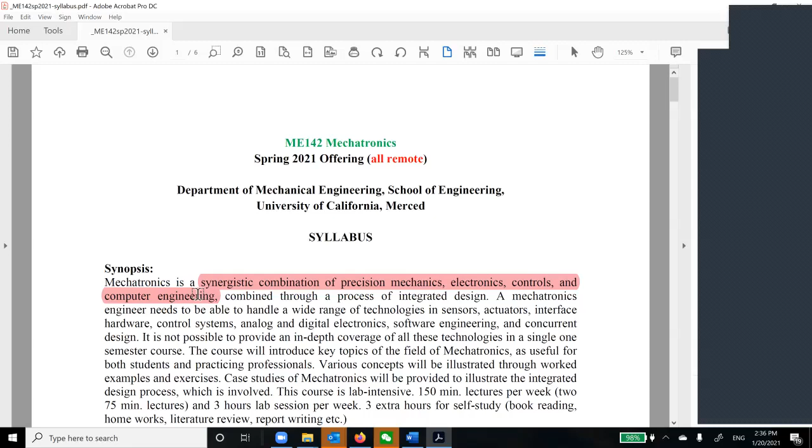So let me do this, I think I can get something here. So this is the word you should remember, called synergistic. Mechatronics is a synergistic combination of precision mechanics, electronics, controls, and computer engineering. So you have 4 aspects.

So mechatronics is going through a process of integrated design, so this is another term, integrated. We are going to go through this one later in today's lecture. So you should be able to handle a wide range of technologies, okay, in sensors, actuators, interface hardware, control systems, analog digital electronics, software engineering, and concurrent design.

So what we are going to do is not to pursue an in-depth coverage, on the other hand, we cover all the foundations. So this is a course called Foundations of Mechatronics. Over the years, I started my career in UC Merced in 2012, so it's been my 9th year.

I'm thinking about Mechatronics II, so more advanced topics. So this is, again, this is the foundation class, okay. So we are going to cover all the key topics in mechatronics, so you are ready for the career. And I believe this course will make a big difference in your job market competitive edge.

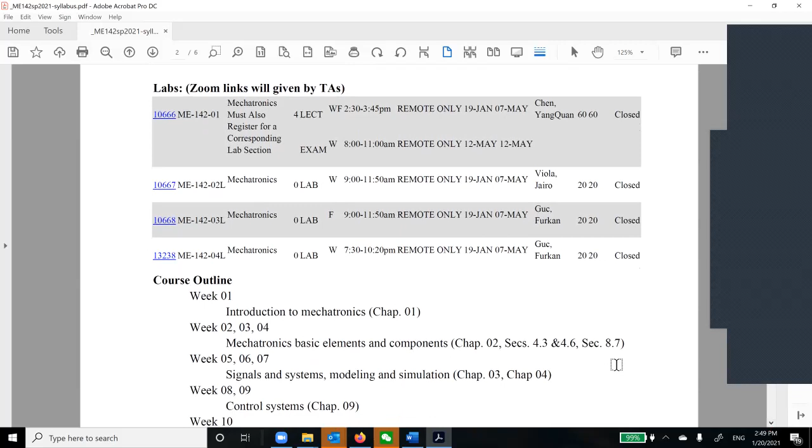So here's an outline. Today we are here, week 01. We are doing the intro.

I want to tell you that the definition of mechatronics is not unique, there's no agreed upon definition. So I want you to look for more definitions of mechatronics. That's homework number 1: go to the websites, find your favorite mechatronics clips, and summarize the top definitions you like.

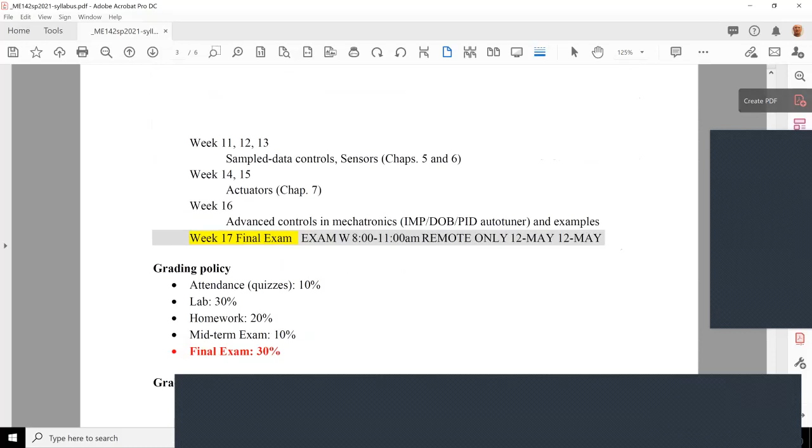Then we have about 3 weeks on components, elements, and components. After that, we are going to do signal and systems, modeling and simulation. We'll probably speed up a little because our labs are all distant and remote, so we need to heavily rely on MATLAB Simulink.

Good news is we are going to have interactive labs, and in the end, hopefully you are going to design some of them for the future. So you can see I'm covering modeling and simulation, signal systems, control systems — these are supposed to be separate courses. On the component side, microelectronics and op-amps, we're going to cover some of that.

Then we have a spring break, so I'm going to give you a take-home midterm exam. It's a way to force you to summarize everything up. After that, we're going to talk about digital controls, controlling using the microprocessor. What are the things there? Sample data control, and what's the consequence of sampling?

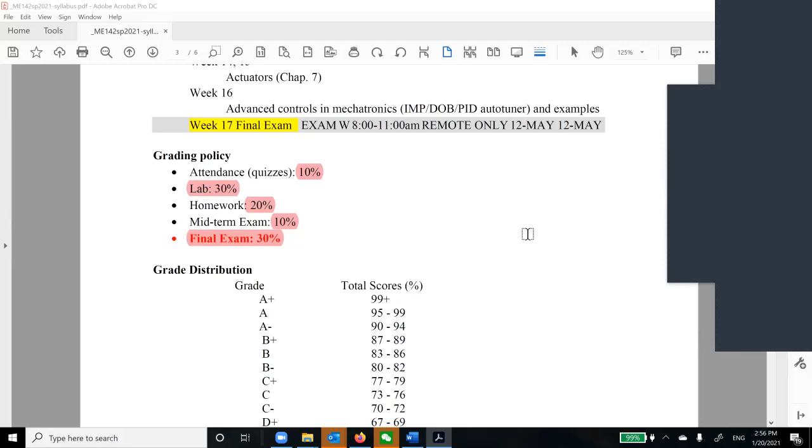All right, so any questions at this point? Again, I'm easy, okay? I'm easy. I'm not a killing professor. I'm not going to kill you. I'm here to help you learn, so that you can feel proud that, hey, I learned mechatronics from Dr. Chen.

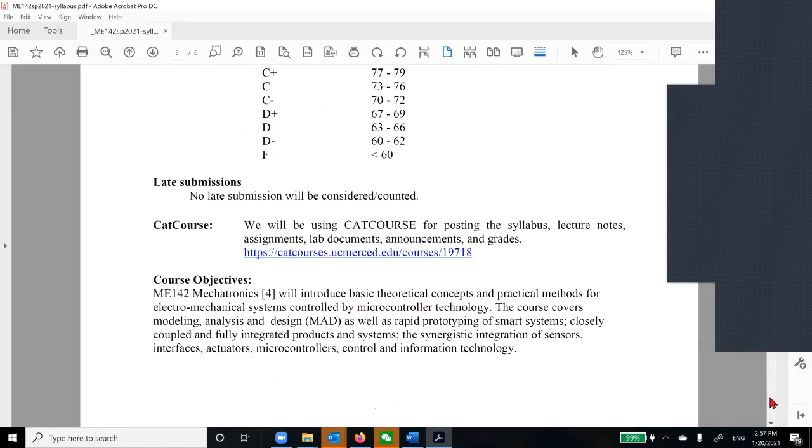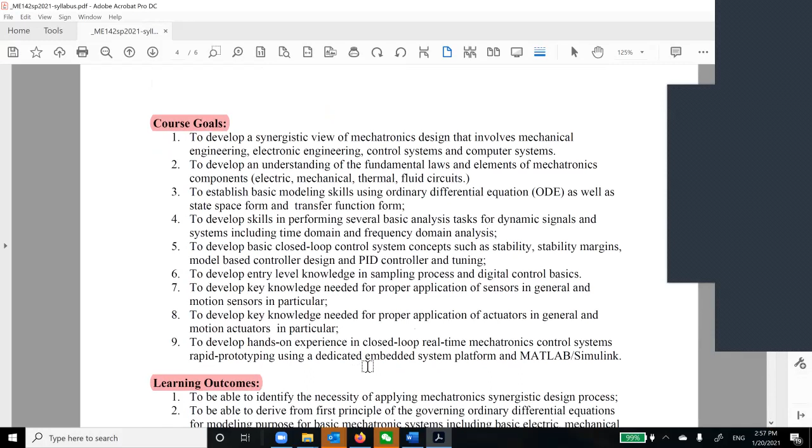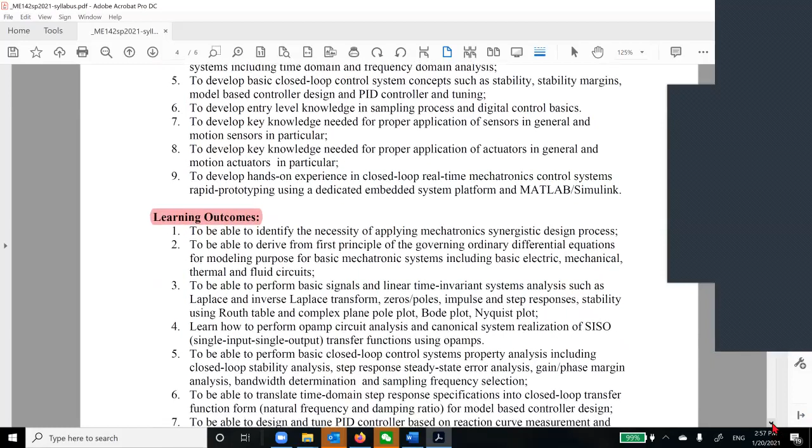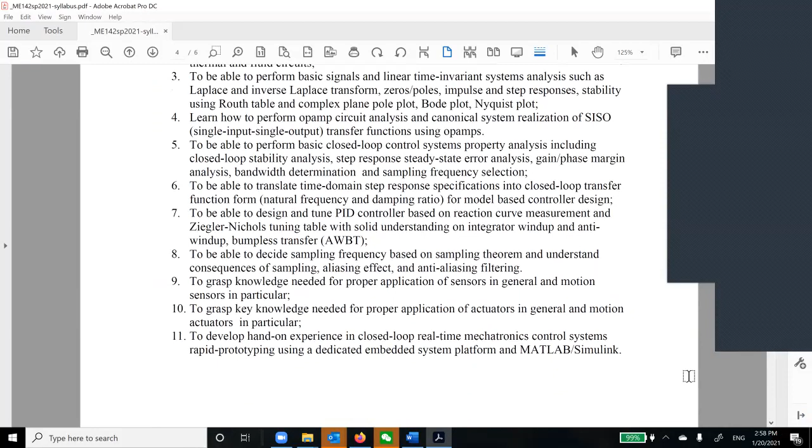And I think others are standard. So if you need any help, we have course goals defined, learning outcomes all defined. Then probably we should revisit this list to see, did we really learn all these? This is like a contract between you and me. I guarantee you guys, when you revisit this list, you'll see, yeah, I know this.

Okay, and we also have some standard policies. I never wrote this one, I use what they call boilerplate text. I just use them, so it's standard. I didn't add or delete anything.

Academic dishonesty statement: I think in this difficult time, we assume everybody will be honest to yourself in the learning process, unless otherwise. For example, if you submit something and you are wrong and you made exactly the same mistake as others, then we'll ask you, what's going on here?

If you have any requirements, there is a dedicated resource for you to get help when you need a disability accommodation, okay? It's called Student Accessibility Service. Don't feel shy, just ask, okay?

So let's take a look at Mechatronics Introduction. This deck of slides is very classic and we should not ignore it. I said this is actually in the course syllabus, defining what mechatronics is. One word is synergistic: a combination of Mechanical Engineering, Electrical Engineering, Control Engineering, and Computer Engineering through the design process.

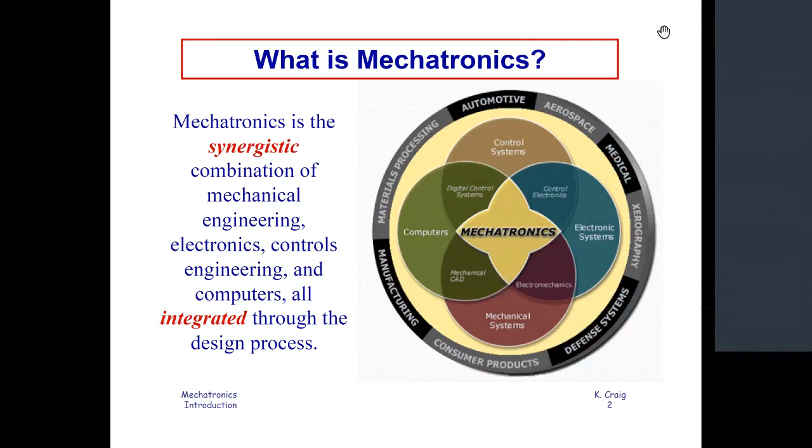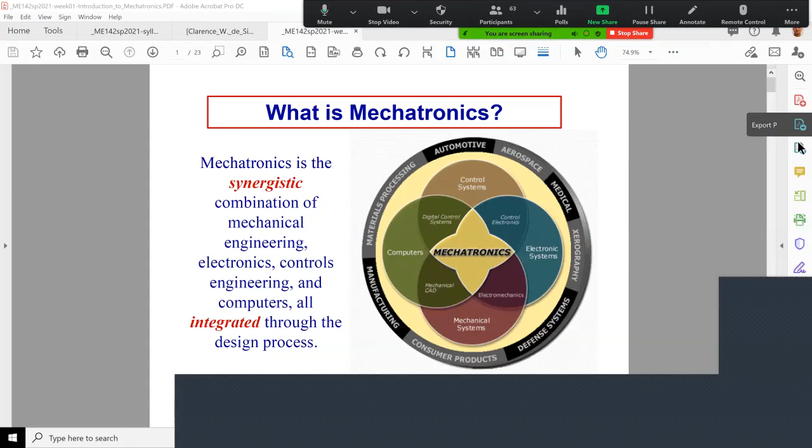All right, so we have basically three circles here. Let me see if I can use my pen to draw... No, I don't know why I cannot do this. This is because I have to be on comment mode so that I can use my pen to write. Yes, let me see. Now I can write.

So you have control systems, okay, we are missing a course. We have computer engineering, we're also missing a course. For mechanical engineering, you probably learned a little bit on statics and dynamics. I don't think we have learned electronic systems. Electric circuits is still on a very abstract level. Electronic system is more on the microelectronics side.

Those intersection parts are our mechatronics. And I'm going to share with you the industry sections: defense, medical, aerospace, automotive, and so on and so forth.

So let me give some examples around your house. Is a refrigerator a mechatronic system? Yes. Is a rice cooker a mechatronic system? Yes. Is your dryer and washing machine mechatronic systems? Of course, yes. So you can use many examples. Is your garage door opener a mechatronic system? Of course it is. And so on and so forth, it goes on and on. So it's hard to find useful electromechanical systems that are not mechatronics.

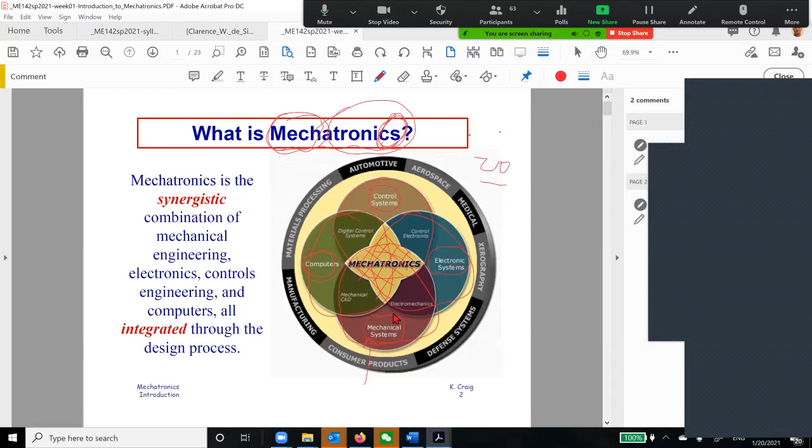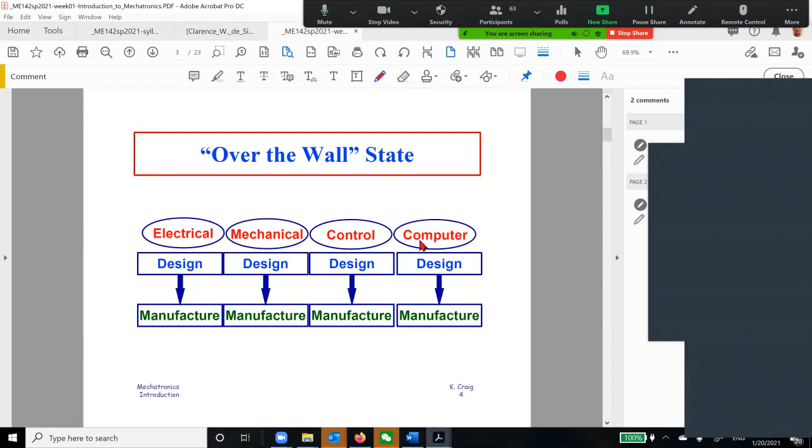These 4 circles, okay, these 4 circles are here: electrical power, mechanic department, control, and computer. So now they are just removing that wall and doing it the mechatronics way, okay.

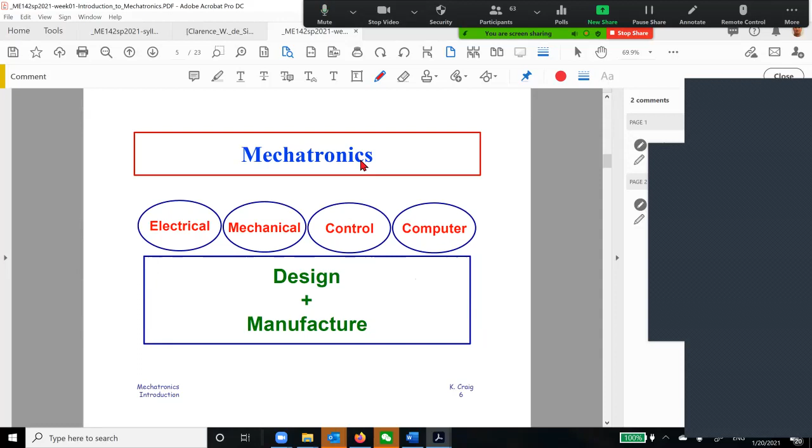So in other words, we have a higher standard for engineers. They have to have this mechatronics way of thinking, this foundational training, like you are taking right now, to meet this wave - increased system complexity, reduced cost. Otherwise, you cannot survive, okay.

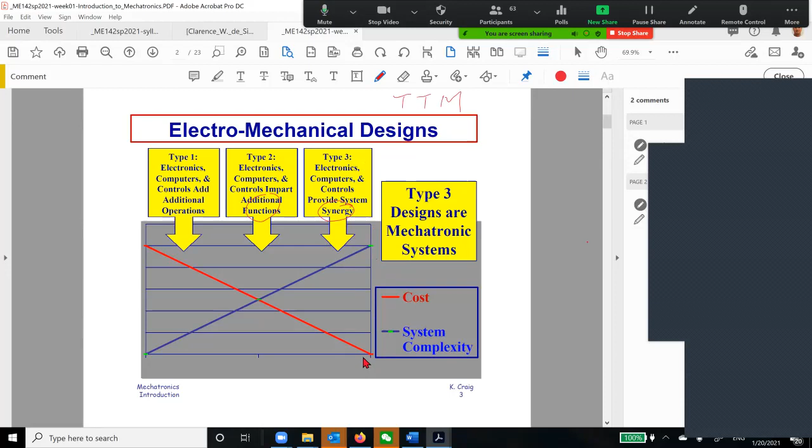So that's called the design challenge. You need a cost-effective incorporation of electronics, computers, controls, and mechanical systems. We need a new way of thinking, a new approach towards synergistic design. So today, if you want to be a modern engineer, you must learn the synergy of mechatronics. For example, you design a temperature sensor - you shouldn't just work on the sensor, you should also know the whole system: the sensor is used in which system, for what kind of performance, in a closed loop setting, okay.

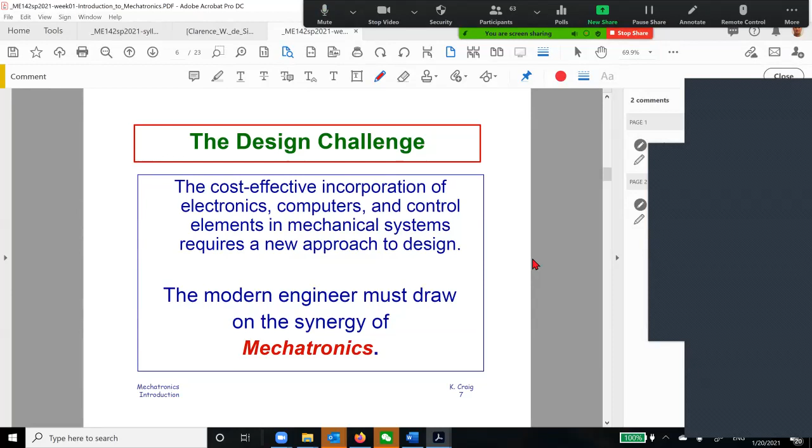It's difficult because you have to have the big picture view of the system. You design a sensor, the sensor used in the system, so you have to know the system before you design the sensor. Also the system has different elements, components that interact with each other, so you should know how those interactions work.

You also need to know modeling, without just thinking on the real thing, especially since some stuff you cannot try and error in a garage. For example, with aircraft you cannot have a pilot try the aircraft and crash over and over, it costs life. You cannot do some dangerous things on a nuclear power plant.

You have to use a modeling simulation session. You don't want to directly try something on the nuclear power plant, it will cause disasters. In particular, when you have a closed loop system, you want to make the system behave like you wish. For example, you have a room temperature control in your house, you have a set point on the wall, so the system will adjust temperature. It's called a temperature regulator, you regulate the temperature around your desired point.

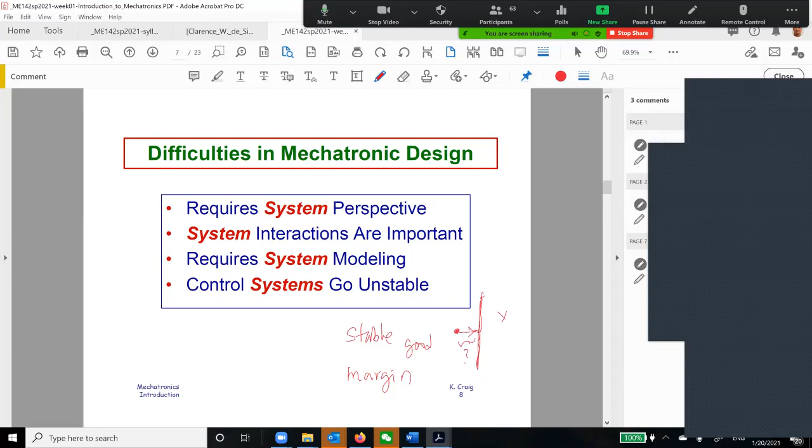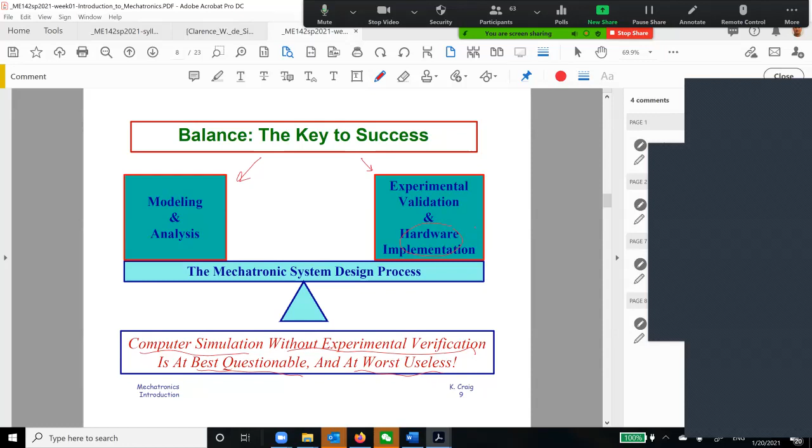So the key to success here is, yes, we need hardware implementation, we need experimental validation. Computer simulation without experimental verification is at best questionable, at worst useless. So how do we answer this question in our COVID time? Because we heavily do the simulation side, we're not doing the hardware side. So how are we going to survive in view of this picture?

If you want to Google, I wish you will, something very popular in the recent two to three years, it's called digital twin. If you can make a digital version of your physical system, we don't call it a model anymore because it's so authentic, it is so authentic, it is a digital twin of the physical system. So from that perspective, this physical system, we should call it what? It's a physical twin, then I have a digital twin. The digital twin is a big topic, so I suggest you Google this and learn some basics. In the last lecture, I'm going to lead you towards the future of the digital twin.

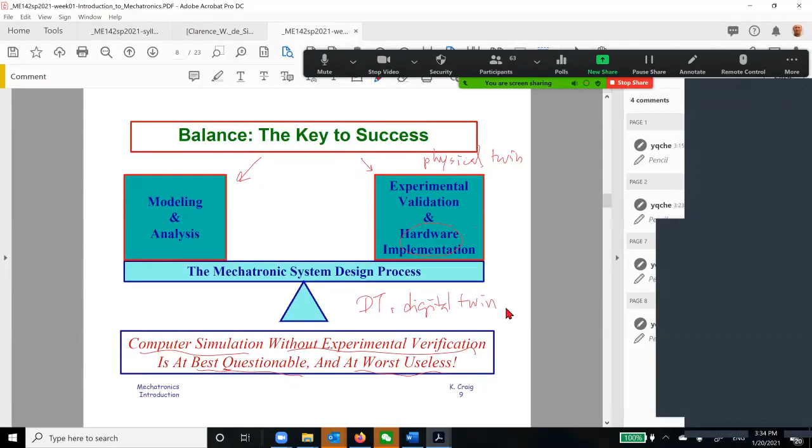Good. So we only have 10 minutes, let me start showing you some videos before we finish up. Actually we do have more slides left over, but you need a balanced foundation in mechatronics. Balanced foundation is the key, so that's why I hope you should have all these types of skill sets, like modeling, analysis, and design.

In fact, if I don't include design and just call this one M, A, it's called MAD - with design it covers modeling, analysis, and design. I hope everybody will have some skill set covering MAD. Do you know that I wrote a MAD book? Let me show you.

I'm not trying to promote my stuff to you, but just to give context so you understand. If you say, 'Oh, I only know how to do modeling,' sorry, that's not enough. You also need to learn how to do analysis, and you also need to learn design, so that you have a complete system. And as I already said, experimental validation on digital twins or physical twins is key.

Before you deploy that to the customer, you can also do this type of thing. Sometimes they also use this word, I like it: you say, 'Oh, this system is done and it's taken into operation,' or 'Oh, this is commissioned.' I like that term.

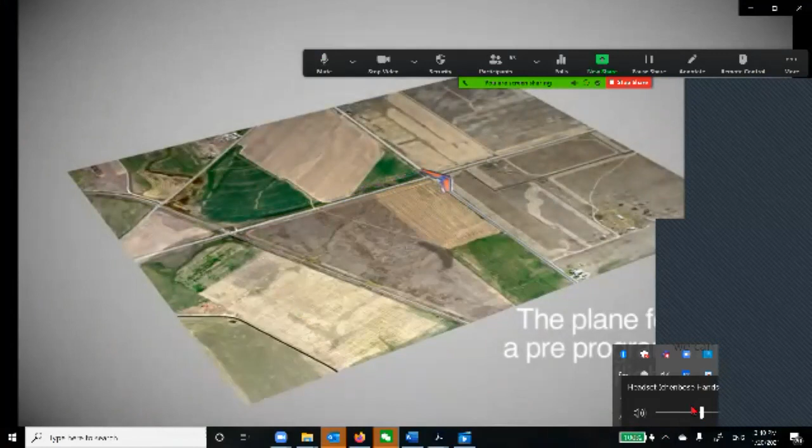After takeoff, the plane automatically goes into its pre-programmed flight plan and takes pictures of the ground every 4 seconds. After its flight plan, it comes back to the ground station. After about an hour's worth of flight, we may have 350 to 400 images. The best solution is to take all of the images together and stitch them into a georectified mosaic.

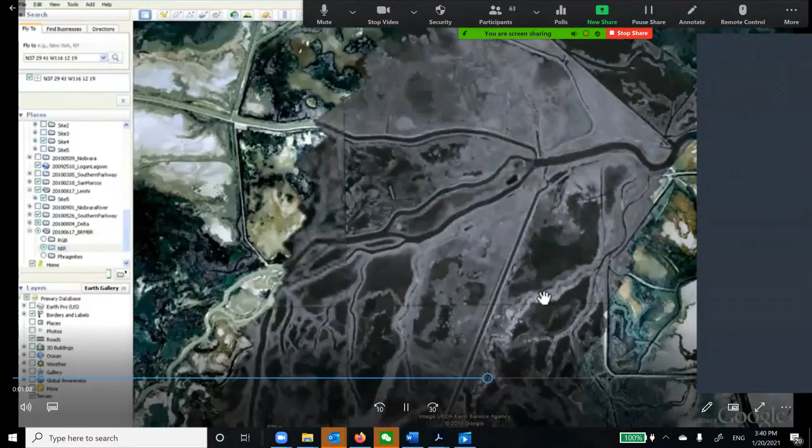What we can do is not only give them the visual imagery, but also the near-infrared imagery. You can take it a step further and actually use the two images to automatically classify the plant species you're interested in.

So that gives you a taste of a specific mechatronic system in action. This is also a main reason I moved to UC Merced, because we have 6 months of snow coverage in Utah, so the drones cannot see much. Here we are in the center of agriculture, so we can use this a lot for agriculture research. I'm having a good time here, I never regretted moving.

Another reason is because of you, because I can empower many students by taking research experience with us. We flew the drones together in the fields.

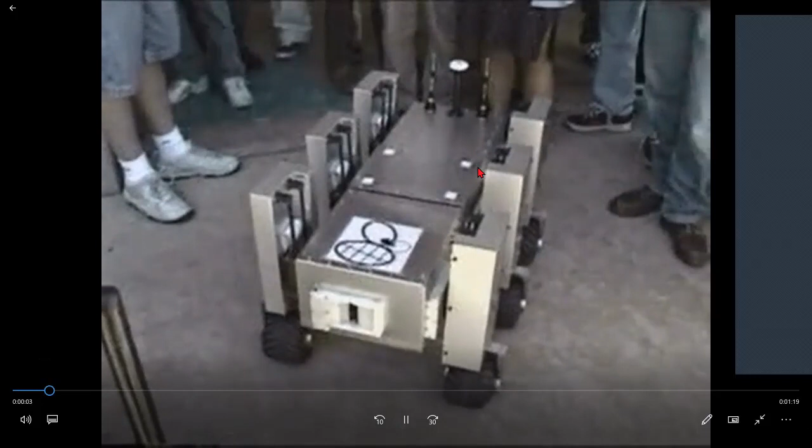I have some more, maybe we can take a look at this one and then finish. This is the vehicle we designed, called the T3 vehicle, which can move omnidirectionally. It has 6 legs, individually actuated, so they can reconfigure themselves in different ways.

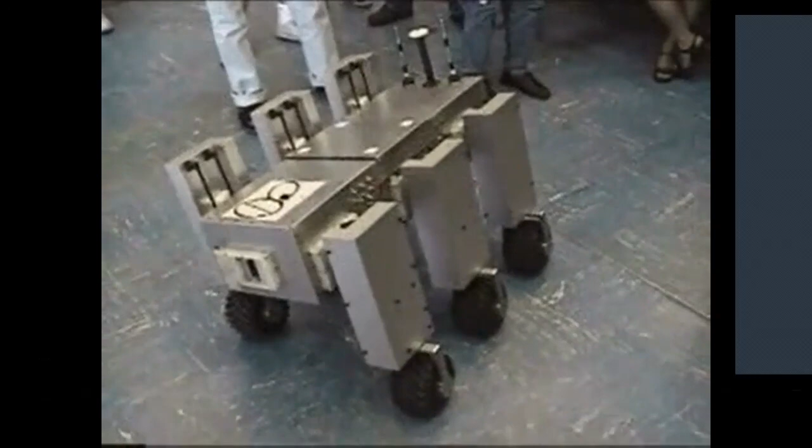We'll finish in 1 minute. You can see they can change the configuration, so they can negotiate terrain conditions very well, and it can spin in place without any turning radius. This is called an omnidirectional vehicle.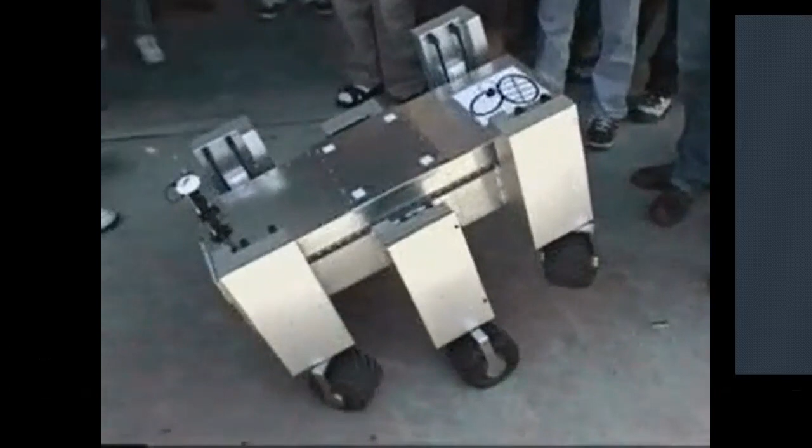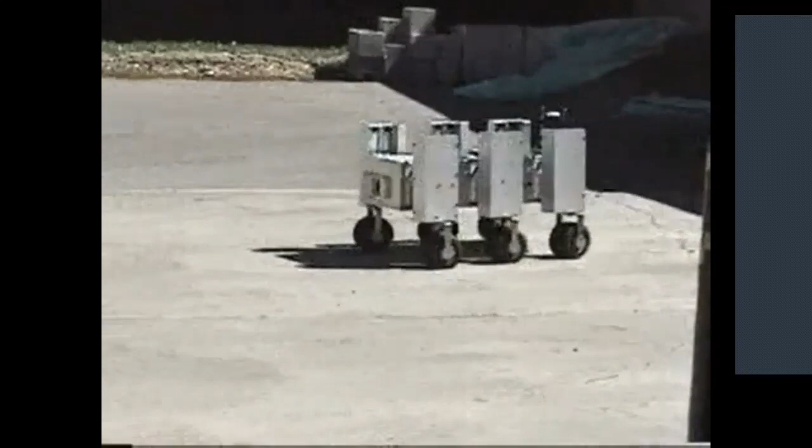Another idea: you can go on a slope, even an unknown slope, and there's a way to maintain the back still level, so you could have a cup of coffee on the back and it won't spill. This involves lots of collaborative work, collaborative controls and sensing, actuation, and complex computational methods.

To do that, you need mechatronics design. You cannot build it in the middle and say, oops, I forgot that, let's redo it. You have to have a synergistic view from the beginning.

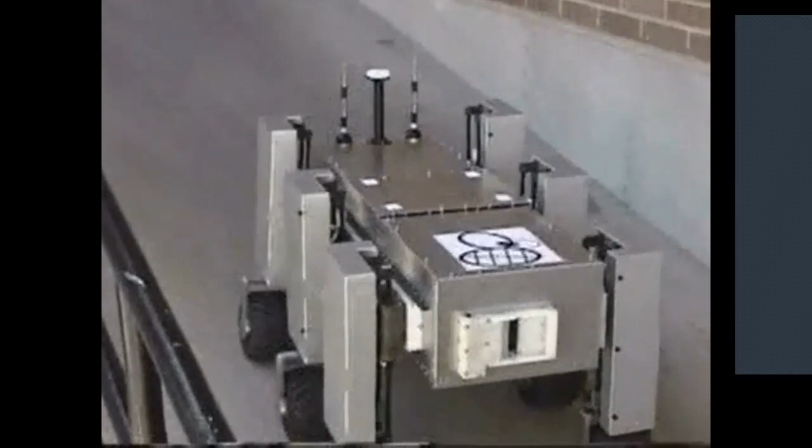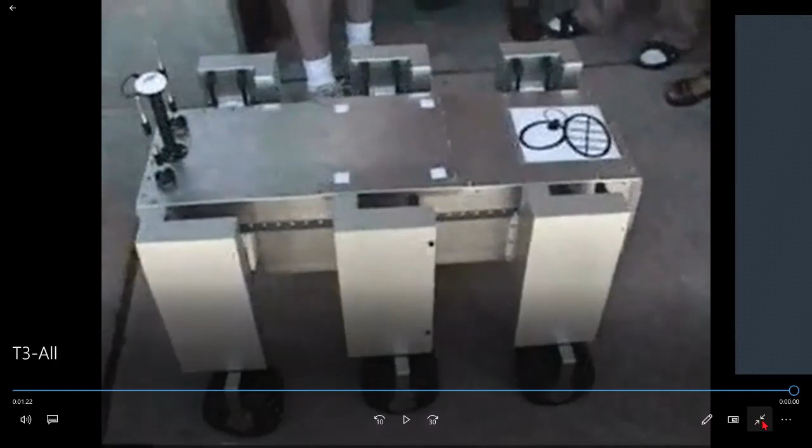So they spin in place on the slope, that would never happen otherwise. This is a world first, it happened in 1997, before I joined Utah, I joined Utah in 2000. Okay, we finish here.

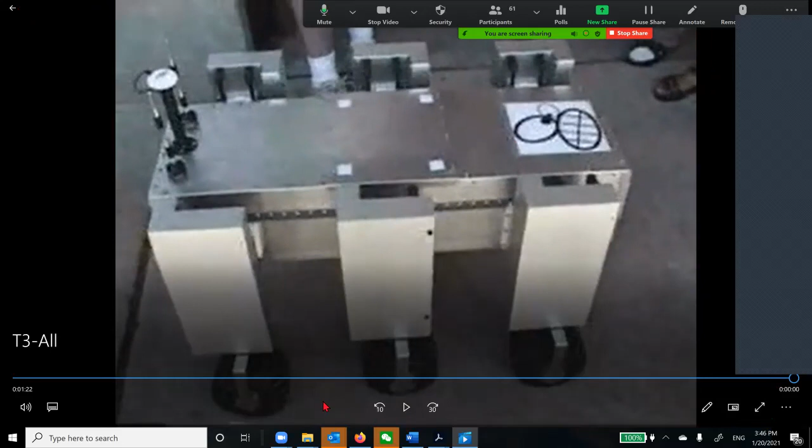I stopped sharing. Oh, I went 1 minute over. In the future I promise I'll finish on time, I know everybody is on some schedule.